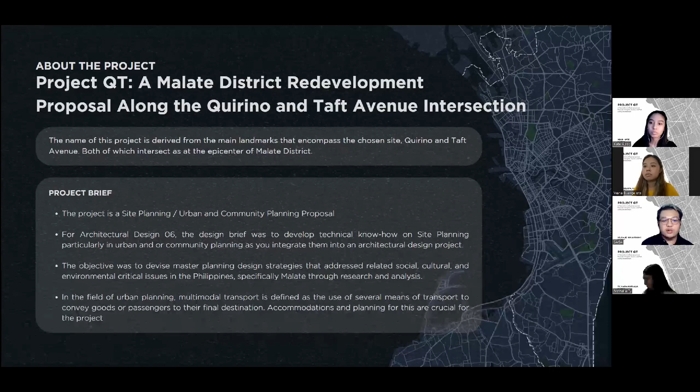In the field of urban planning, multimodal transport is defined as the use of several means of transport to convey goods or passengers to their final destination. Accommodations and planning for these are crucial for the project.

Now let's talk about the project goals and objectives. For the thesis statement: in the District of Malate, multiple issues that span from the lack of specific amenities, visible character, and interventions contribute to the overall welfare of the site and its stakeholders. An architectural intervention, such as climate-resilient urban redevelopment for the mentioned location, should encompass an alleviation of pre-existing issues.

This should address current issues observed, such as environmental issues and social dilemmas. This in turn will increase productivity for the academe in the area, provide comfort for residents, and smoothen transportation throughout the area. Once all facets are achieved, Malate District can be an ideal utopian community that is environmentally responsive and socially adept.

For its vision statement, the project aims to uplift the District of Malate as a utopian city that can be globally recognized, highly valued, and respected by its stakeholders for its efforts toward environmental and social consciousness within Metro Manila.

As sea levels continue to rise due to global warming, an estimated 800 million people will be displaced and affected. According to C40, a lot of land will be underwater by mid-century. The project proposal aims to define Malate Manila with a utopian essence that fills the lack of community character of the existing district. It also needs an appropriate change of the urban area to enhance its overall appearance.

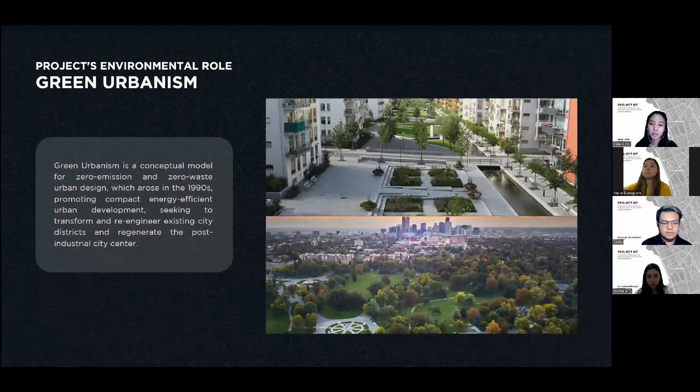It rests on three pillars that interact with each other: energy and materials, water and biodiversity, and urban planning and transportation. Some of the key elements of environmentally friendly city design are electrified public transportation, energy-efficient buildings, and renewable energy

solutions. Next, for addressing the rising sea levels. Our project's environmental relevance is tied to our intervention in the inevitable issue that is rising sea levels. This particular issue is found to engulf Pacific nations.

Cities started sinking when the West started over-consuming resources and overproducing waste that affects smaller countries in the East. More frequent and intense droughts, storms, heat waves, rising sea levels, melting glaciers, and warming oceans can directly harm animals, destroy the places they live, and wreak havoc on people's livelihoods and communities.

As climate change worsens, dangerous weather events are becoming more frequent or severe. Coastal cities on the front line of the climate crisis could sink below the waves by 2050. Pacific islands are lost to rising seas as climate change hits.

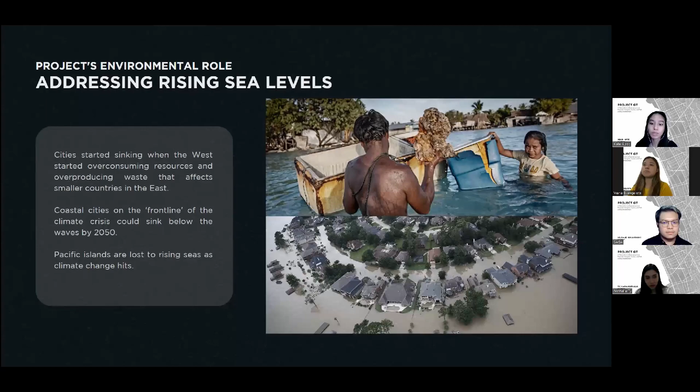The proposed design will create a cluster of residential units that will be able to adjust to the rising levels of flooding or rising sea levels of swelling rivers. This will be possible with an engineered pontoon system to provide buoyancy for housing units for the affected residents without having the need to relocate them.

Now let's talk about the project's social role. On the other hand, the project proposal also holds society as a crucial factor to consider.

Hence, the team formulated its social relevance and role based on the issues with the human scale or experience within urban cities. With new urbanism, it focuses on human-scale urban design. It wants to see those human-scale neighborhoods return. It makes placemaking and public spaces a high priority.

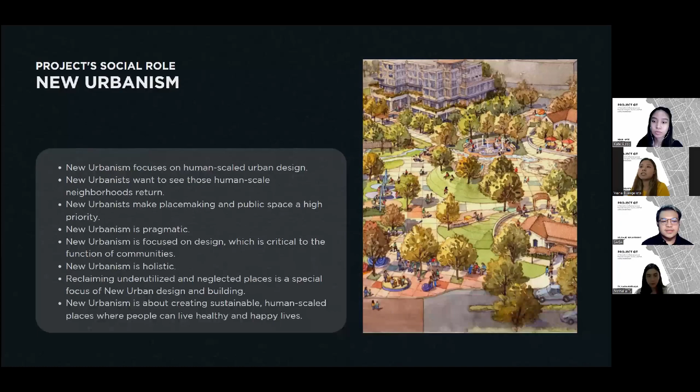It's pragmatic. It's focused on design, which is critical to the function of communities. It is holistic, and reclaiming underutilized and neglected places is a special focus of new urban design and building. New urbanism is about creating sustainable, human-scale places where people can live healthy and happy lives.

Another theory was utilized to complement what was mentioned prior. The team of designers found the connection between the project's social role and busy streets theory. Busy streets theory offers a perspective that highlights the idea of turning the neighborhood into a safer and empowered place. This deals with the improvement of physical environment, which eventually promotes physical safety and inspires psychological empowerment and a sense of investment and connection among neighbors.

Crime prevention through environmental design is a series of strategies that modifies the physical environment to improve neighborhood safety. It reduces crime and the fear of crime within the neighborhood, since it promotes positive interaction with the space by legitimate users. It is comprised of 5 principles.

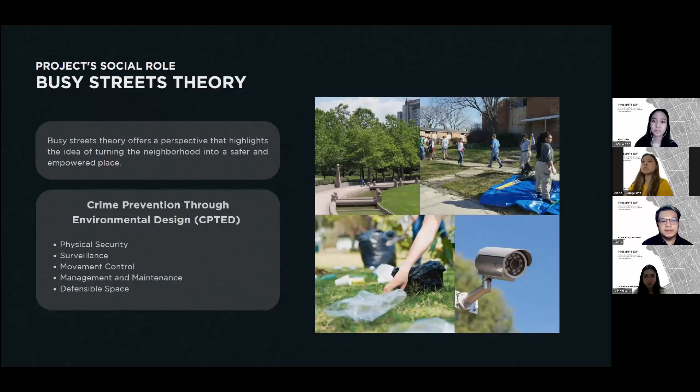First, physical security. Second, surveillance. Third, movement control. Fourth, management and maintenance. And lastly, defensible space. To aid the process of redeveloping the district, the designers opted to incorporate the placemaking theory.

This heavily focuses on transforming public spaces by observing, listening to, and asking questions of the people who live, work, and play in the particular place in order to understand their needs and aspirations for the space and their community as a whole.

Lastly, to secure the social role of the project, the design follows the nature of superblocks or city blocks. This is a theory that addresses issues with circulation, congestion, and accessibility. Superblocks represent an innovative urban planning scheme to reduce the amount of public space taken by private cars in the streets and give it back to the people.

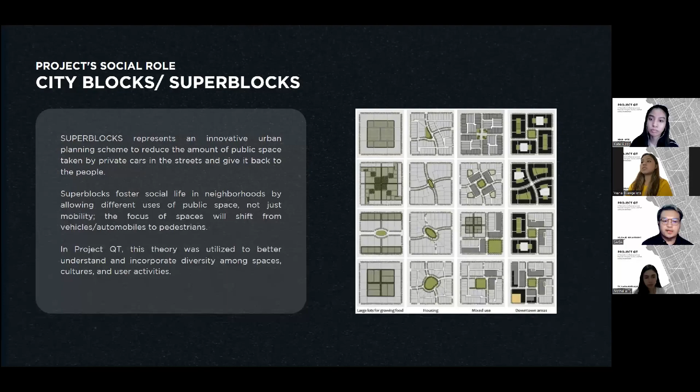Superblocks foster social life in neighborhoods by allowing different uses of public space, not just mobility. The focus of spaces will shift from vehicles to pedestrians. In Project QT, this theory was utilized to better understand and incorporate diversity among spaces, cultures, and activities.

Now let's talk about the concept. For the conceptual framework, in order to understand or better discuss the nature and process of designing Project QT, the design team began with the assessment of Malate's current state, and after vigorous study, the team decided to jump into the idea of a utopian society where all needs are met and errors are at a minimum.

However, further research has provided us with a better understanding that a more realistic or practical outcome would be a eutopian Malate. This is the concept of a good place that is realistically attainable. It is a place of ideal well-being as a practical aspiration compared to the utopia, which was an impossible concept.

To apply this in architecture, the designers combined the aspects of the design theories that had a key role in the process. These would be the superblocks, green urbanism, and new urbanism. As a result, the process would lead to the development of a eutopian zoning system that would reinvent what the District of Malate has for its local zoning system.

For this, existing facilities were also taken into consideration after dividing the whole district into quadrants. Each quadrant would introduce its own collection of proposed facilities and utilities in addition to existing ones, after which is the means of the project to address both environmental and social issues.

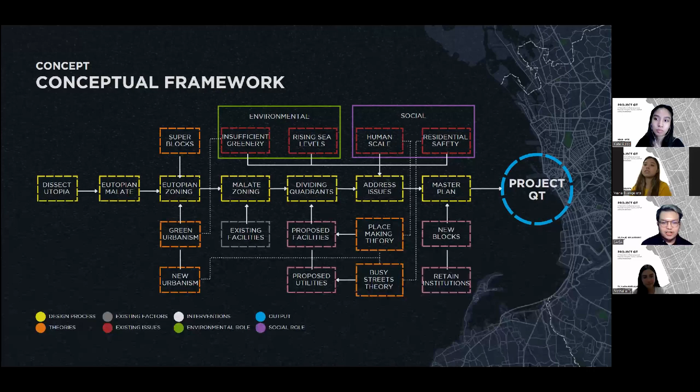Now let's talk about the proposed facilities. As part of the adaptive urban environmental framework of this project, such facilities are incorporated in redeveloping the areas of Malate, Manila.

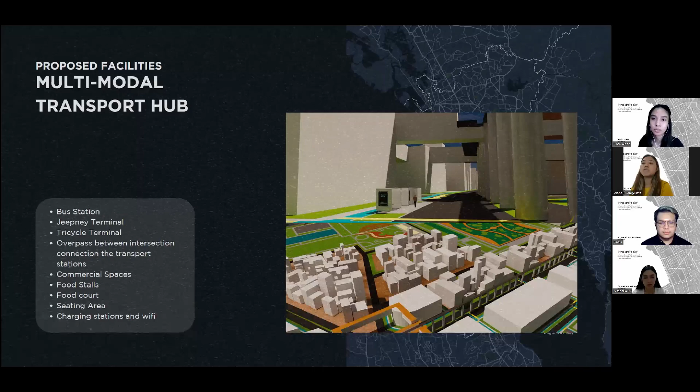First, the multimodal transport hub is composed of terminals for buses, jeepneys, and tricycles, connected to the LRT1 Quirino station, located at the intersection of Quirino and Taft Avenue. The transport hub is designed to provide convenience for commuters. It has food stalls, food courts, seating areas, commercial spaces, charging stations, and Wi-Fi. The terminal on the intersections are connected with overpass to provide safety for the commuters while catering to every need.

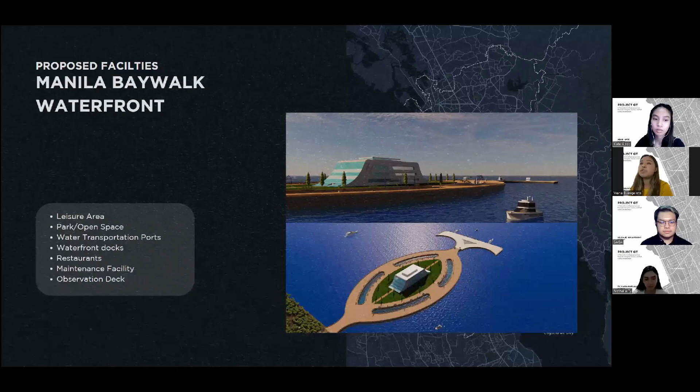Next, the Manila Baywalk Waterfront is designed to help with improving the Baywalk of Manila. The extended floating space has a leisure area, restaurants, and maintenance facilities. It is created to rebrand the Manila Bay from being a dirty and polluted place to a beautiful tourist spot. The waterfront also uses mangroves as part of its coastal defense and elimination of pollution to treat the water and attract wildlife.

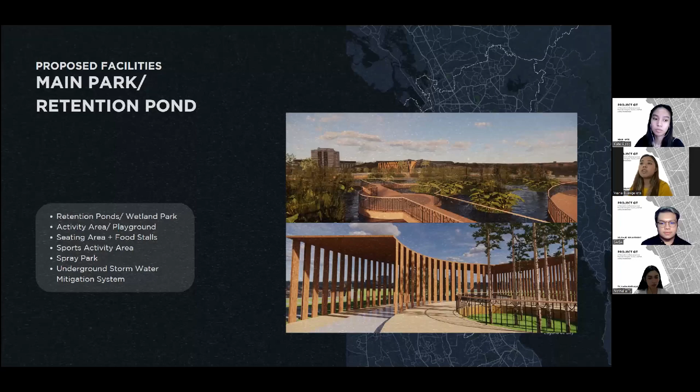For the main park or retention pond, as part of the flood control management of the Malate area, it has a wetland park that can help store the water from the flood of the Malate area. The areas of Malate are designed to have small parks that will serve as drainage for the flood and will then be sucked to the main park. The water will then be stored, filtered, and treated to be safely released back to the sea. The treated water can also be utilized on the facilities of Malate. With this, the flooding of the site can be reduced while providing green spaces for the residents.

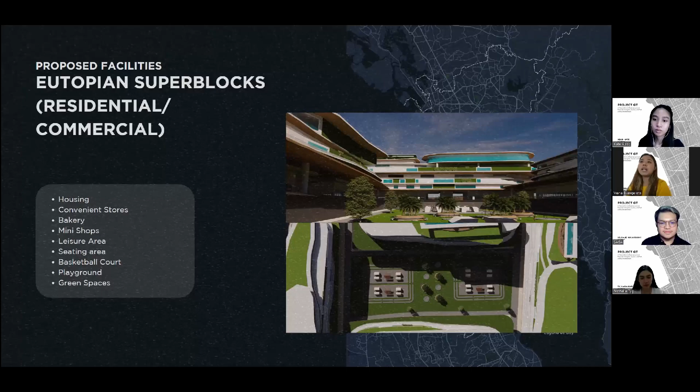The incorporation of the superblocks is a way to provide needs of the people of Malate holistically. It is housing for the residents that has essential amenities such as convenient stores, mini shops, bakery, open space for leisure, seating area, playground, and basketball courts.

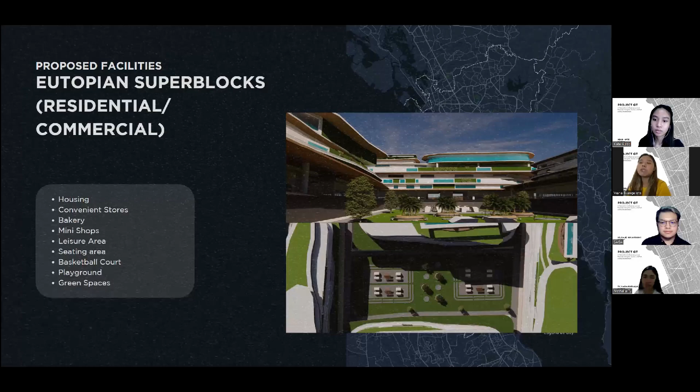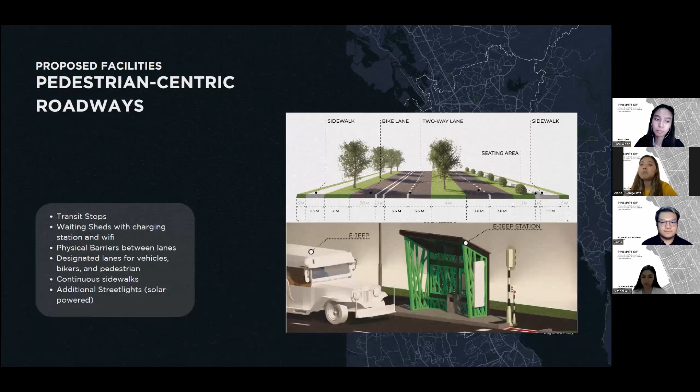Now we'll be talking about proposed utilities. To fulfill the adaptive urban environmental framework of this project, the following utilities are incorporated as part of the design solutions.

First, the continuous sidewalk. As Malate aims to be pedestrian-friendly and with the presence of multiple schools in the area, it is important to design a city that adheres to the safety of the pedestrians. The continuous sidewalks are incorporated in the pedestrian lanes of the area of Malate, inspired by Dutch solutions. The roads shouldn't define the path people are walking in, but the pedestrians should.

Next, glowing bike lanes. Light pollution is one of the problems of urban cities, especially on the road where sometimes there's a poorly designed lighting system that causes wasted consumption of power. To make the streets of Malate safe, the project incorporated glowing bike lanes that require no power. With this, the streets are safe but it won't cause a lot of light pollution.

For micro-wind turbines, the installation of micro-wind turbines will help generate power sustainably. It converts the mechanical energy gained from the strong winds off the coast of Manila Bay into electrical energy.

For buoyancy rafts, also known as the floating or hollow box foundation, this is a type of deep foundation used in building construction on soft and weak soils. The building is capable of adjusting to the flood as it floats from the ground when the water rises. The decision of constructing a deep foundation is taken when the load has to be distributed to an area either with soft, weak, compressible soils or to reach strata that have strong soil or rock, or any other special concerns. With this, the area of Malate can adapt to the sea level rising and risks of storm surges from the Manila Bay.

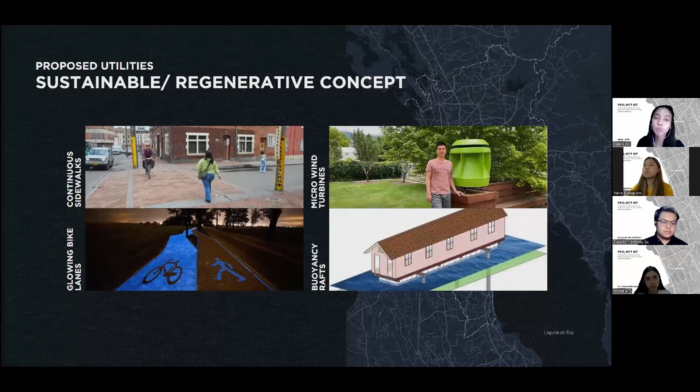For the cistern system, the collection process starts on the rooftop where gravity pulls rainwater towards the pipes leading to a cistern tank. Water passes through mesh screens to prevent large debris from entering the tank.

The collected water is stored underground where temperature changes are less likely to be an issue. The collected water in the cistern can also be filtered and processed to reuse it as clean water.

Next, for solar street lights, while improving the illumination on streets and sidewalks of Malate by making the areas brighter, considering the vehicle's vision on the road, power consumption will be sustainable. With the help of technology, good lighting that leads to a better ambience of the environment can be achieved without contributing to the excessive energy consumption of urban places.

Next, the use of mangroves as coastal defense can help reduce the risk of storm surges and tsunamis in the bay area of Malate. Mangroves are known to thrive at the front line relative to coastal hazards, giving indications of their ability to cope with hazards and recover from major coastal impacts. Also, mangroves provide benefits that will improve the physical environment of Malate District, helping with air pollution, water purification, and tourism.

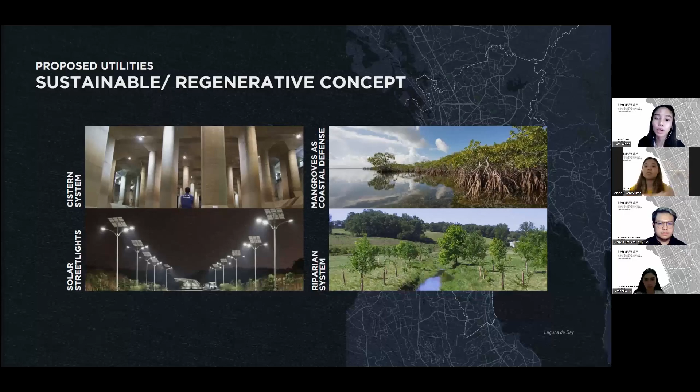Now let's discuss the master plan and development. The area of Malate is divided into 4 quadrants as part of the design process of the project. Each quadrant is composed of design solutions that address the problems of the site, categorized into residential, commercial, and mixed-use spaces formed into superblocks. Each quadrant has a part that serves as drainage during flooding, but the main part that helps store the flood of the Malate area is Quadrant 1.

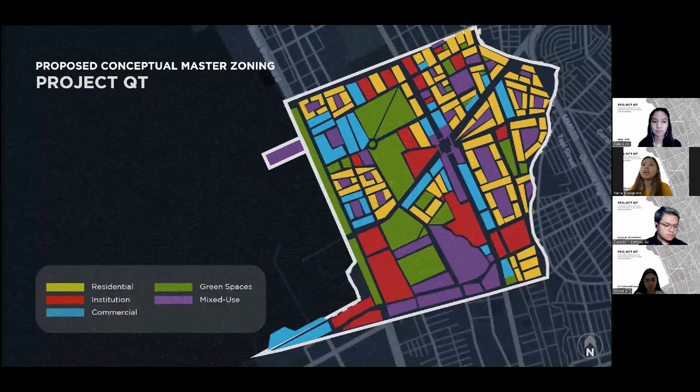In Quadrant 1, it is composed of residential, commercial, and mixed-use areas with green spaces such as the main park and the Manila Bay waterfront. Quadrant 1 focuses on the flood control management of Malate District, having the main park that stores and filters the water, and the waterfront that serves as a barrier for storm surges.

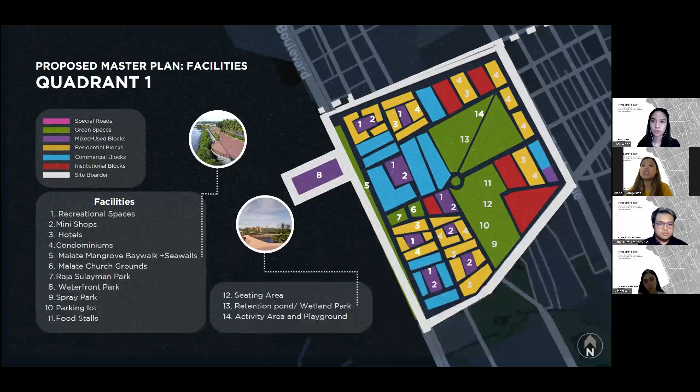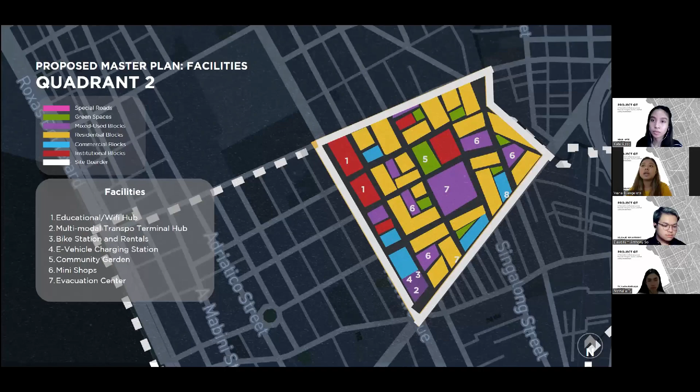In Quadrant 2, it focuses on the multimodal transport hub and evacuation center. Similar to other quadrants, it aims to improve the residential and commercial spaces of the site while retaining most parts of it. The buoyancy raft strategy is applied to the foundation of the buildings to adapt to flooding and sea level rise in the area. It also has a park connected to the main park that serves as drainage for Quadrant 2.

In Quadrant 3, it focuses on retaining the already existing buildings and sites, including the Harbor Square, Asian Garden, Manila Zoo, Bangko Sentral ng Pilipinas, and De La Salle University, while providing solutions to the problems of flooding and safe streets and roads. It has a park connected to the main park to serve as drainage in Quadrant 3, while providing green spaces for leisure and community gardening to the residents.

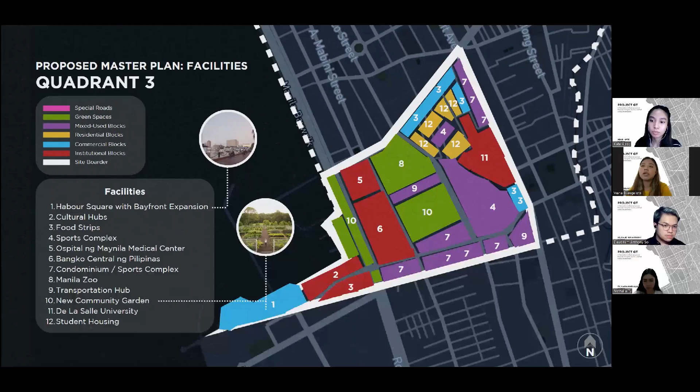In Quadrant 4, similar to Quadrant 3, it focuses on retaining already existing significant buildings such as De La Salle College of Saint Benilde, St. Scholastica's College, and the residential and commercial areas. The residential areas are designed to be organized while providing safe streets and roads to address the problem of narrow and unsafe streets. With the help of superblock design, the project was able to provide mixed-use spaces for leisure. Quadrant 4 also has a part connected to the main park to serve as drainage for the area, as part of the flood control solution.

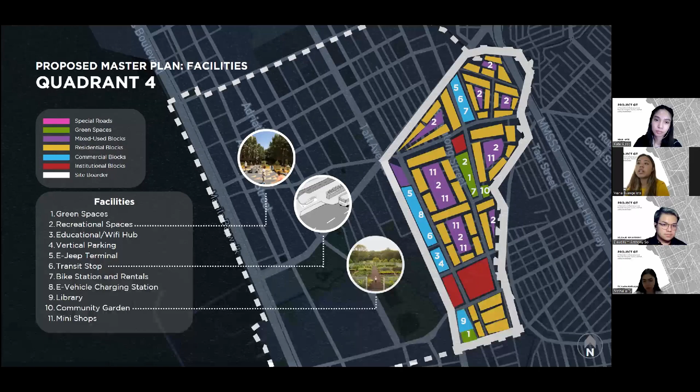Now let's discuss the architectural and environmental design solutions. In order to address the environmental issues at hand, the design introduces a large-scale cistern connected to multiple collection basin points across the whole district. The mechanics of a cistern vary by system.

The collection process usually starts on a rooftop where gravity pulls water, specifically rainwater, towards a pipe leading to the cistern tank. Water passes through mesh screens to prevent large debris from entering the tank.

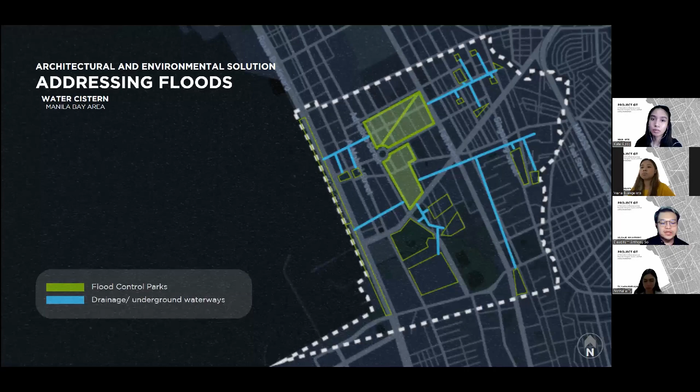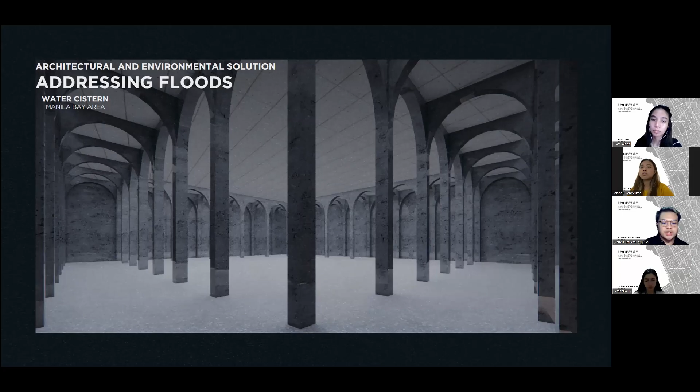The collected water is stored underground where it can be processed and reused for cooling down the city, or before being released. When it is needed, water from cisterns is pumped by an electric pump for release or distribution. All in all, this is a major feature in addressing the potential frequency and severity of floods and heat waves.

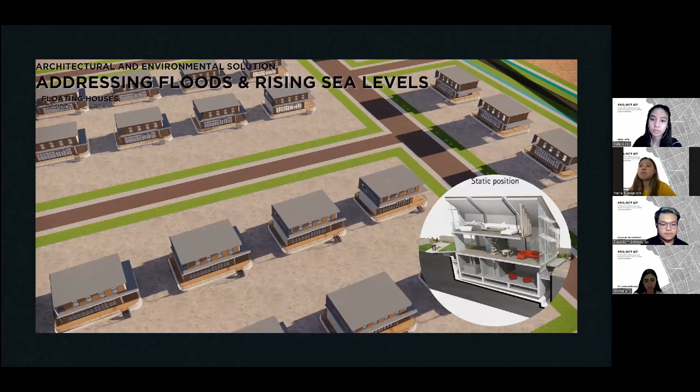Another solution for imminent floods and rising sea levels is the team's engineered floating houses, wherein buoyancy rafts were incorporated in the design to allow it to float up and rise to any level during a flood event, yet remain at a static position in the absence of floods or surges.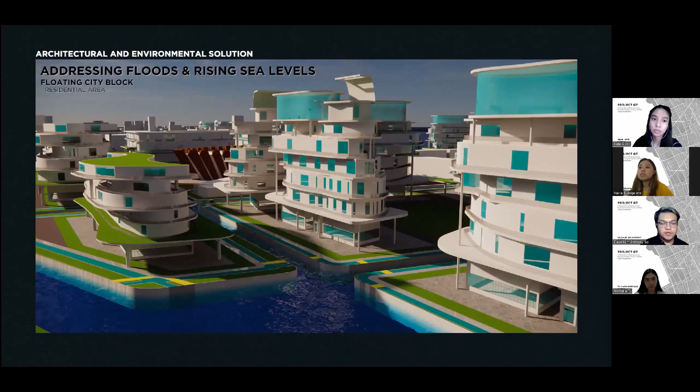The same concept applies to addressing floods and rising sea levels through floating city blocks. As the seawater level rises, so do the city blocks adjust to its level.

The next architectural and environmental solution we employed is the option of having an organic barrier along the coast. The team opted to use mangroves as a coastal defense along the Manila Bay area. Once again, these vegetations possess the ability to store carbon, purify water, and can be a sight to see.

These were utilized because they reduce wave damage from storm surges. They have been shown to have the durability to withstand tsunamis and reduce any impact. These inevitably reduce erosion by binding soil together with their dense root systems.

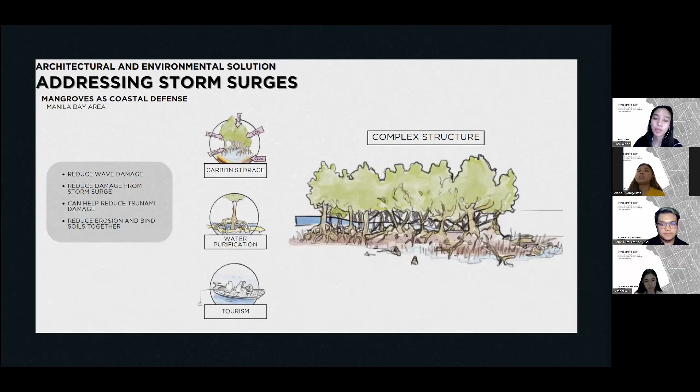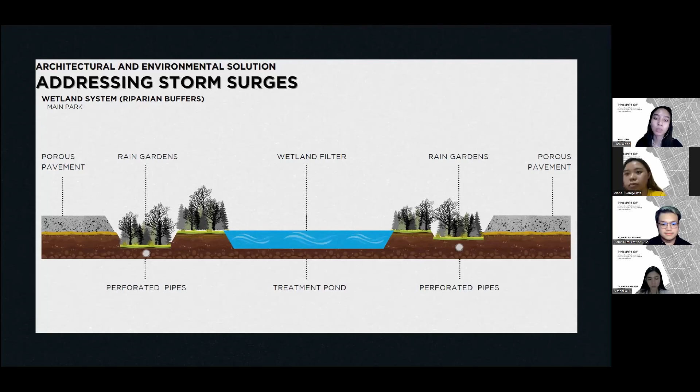As previously mentioned, riparian buffers can help reduce the risk of flooding in the areas of Malate. The idea of riparian buffers is incorporated in the main park of the site as part of the flood control management. It will help with the retention ponds by collecting water in one area beside vegetations that consume the water. The excess water that can no longer be absorbed by the vegetations will now go to the wetland part or retention pond of the main park.

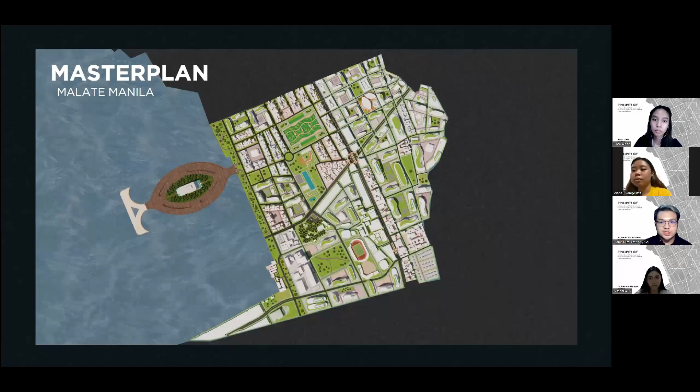Now we will be presenting our master plan. This is our master plan of Malate, Manila, Project QT. This is a visual representation of the submerged metropolitan area within the year 2100 of Malate, Manila.

Now we will be presenting our vignettes. This is the waterfront development of Manila Bay area.

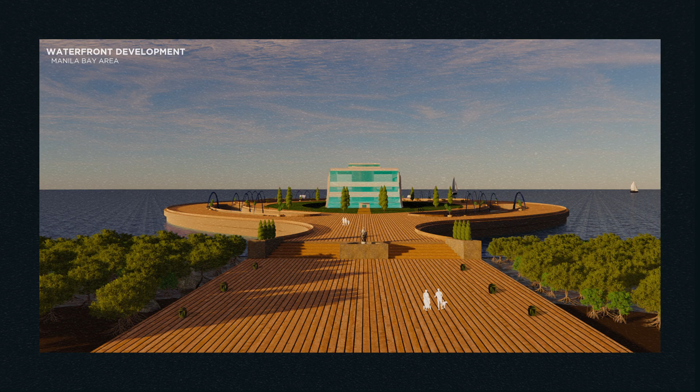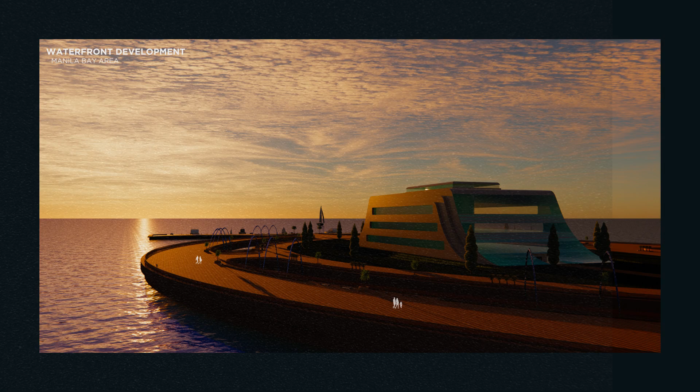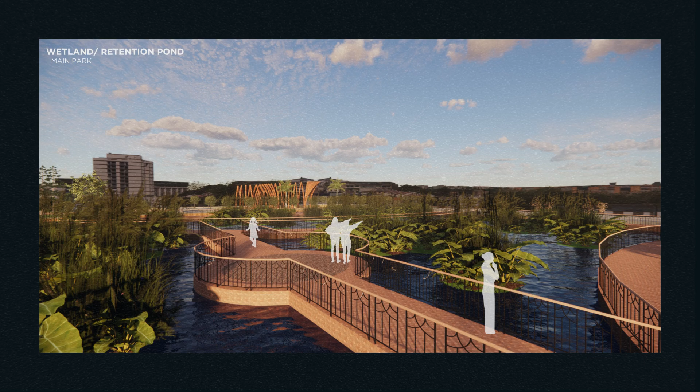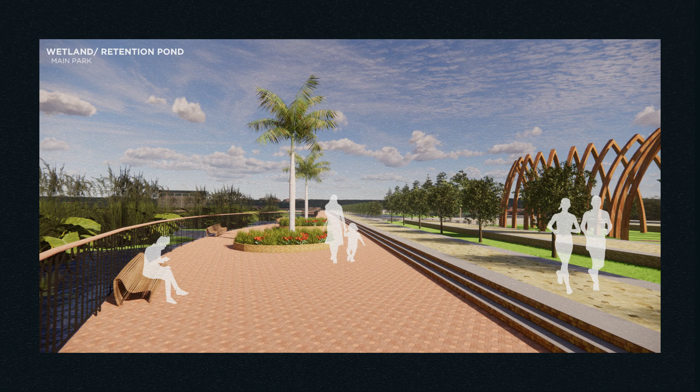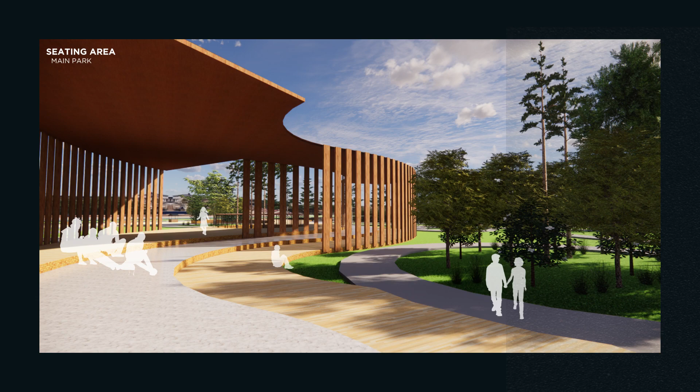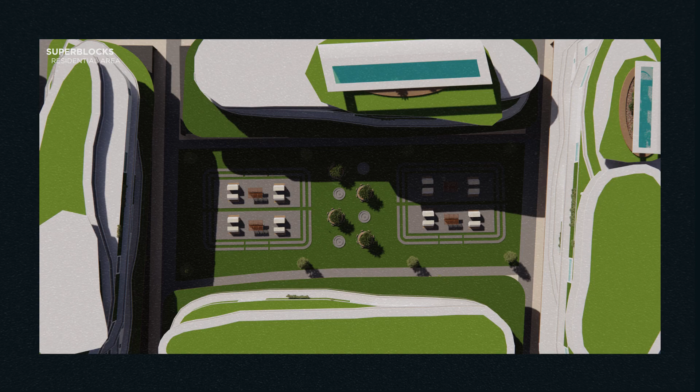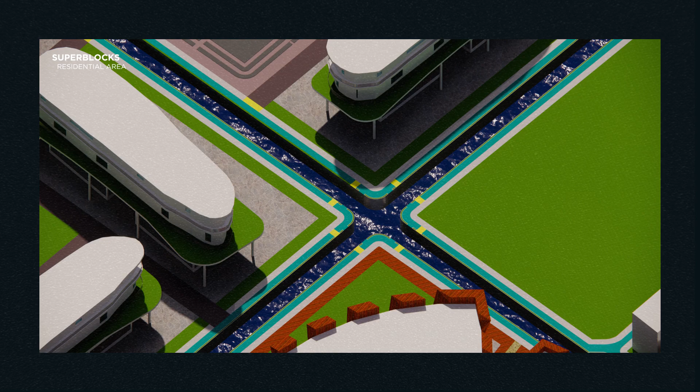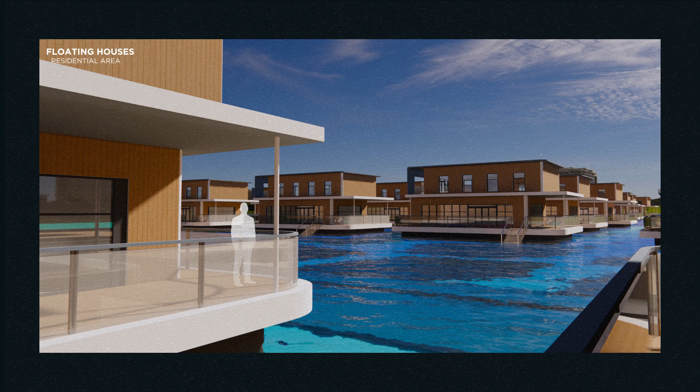This is the super blocks for the residential area. These are the floating superblocks. These are the floating houses for the residential area. These are the floating houses as the water rises.

These are the road systems along Malate District.

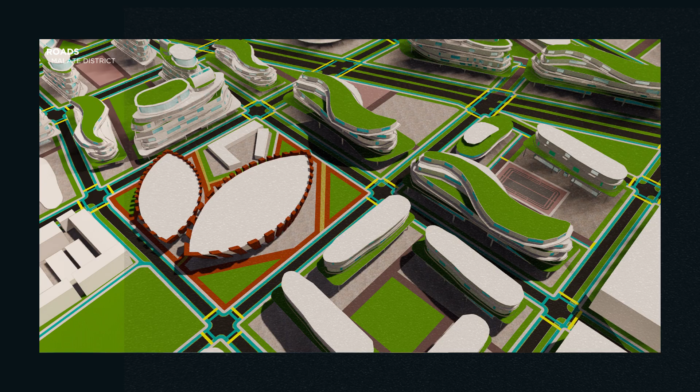Now we will be concluding our presentation. Project QT, a Malate District redevelopment proposal along the Quirino and Taft Avenue intersection.

In conclusion, once again, this project is named after the main landmarks that encompass the chosen site, Quirino and Taft Avenue, both of which intersect at the epicenter of Malate District. This project aims to be a comfortable, safe, transport-efficient, and environmentally responsive urban development and community planning project curated for the human experience.

By improving the transportation of goods and people across the Malate District, specifically along the Quirino and Taft Avenue intersection, it aims to uplift the District of Malate as a utopian city that can be globally recognized, highly valued, and respected by its stakeholders for its efforts in environmental and social consciousness within Metro Manila.

An architectural intervention such as this climate-resilient urban development for the mentioned location has encompassed an alleviation of pre-existing issues while addressing current issues observed. These include environmental issues and social dilemmas.

This in turn increases productivity for the academe in the area, provides comfort for the residents, and smoothens the transportation throughout the area. Once all facets are achieved, Malate District can be an ideal utopian community that is environmentally responsive and socially adept.

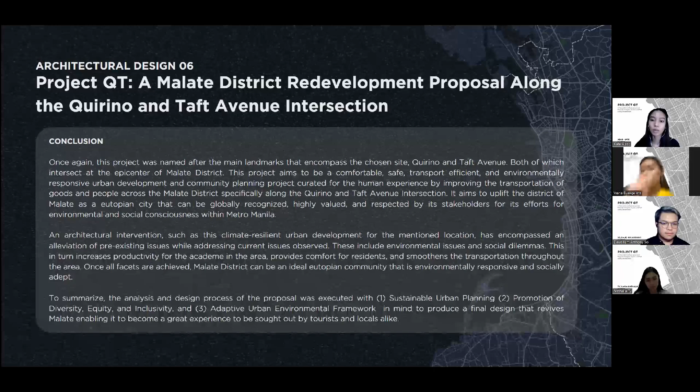This is the end of our presentation for Project QT, a Malate District redevelopment proposal along the Quirino and Taft Avenue intersection. We are Malatium.